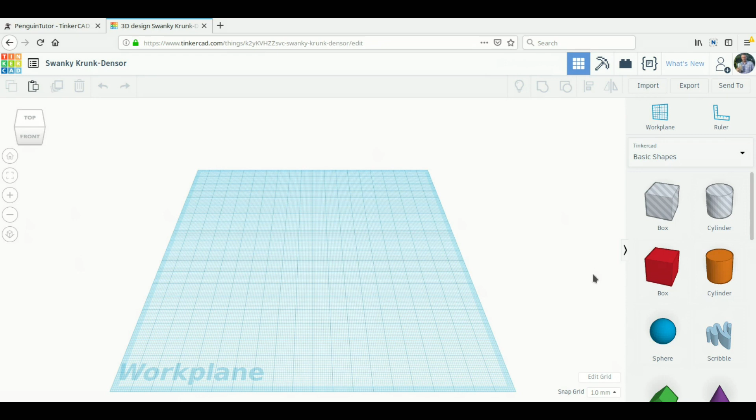So once it's loaded, you see the work plane here. This is approximately the size of a 3D printer, a common 3D printer size. And we're going to use just the basic shapes on the right hand side to create a snowman. So we'll start down with a large sphere for its body.

If you want to be specific about the sizes, you can just type in the dimensions here. So I probably want it double this size, you see each one set separately, and the height one is here. And that gives you a sphere. Alternatively, you could have just dragged them out. If you hold the shift key, then it'll keep it as a perfect sphere.

However, being a snowman, rather than going for a perfect sphere, I'm going to go for slightly elongated. I'm just going to stretch that a little bit, so it's slightly taller than it is round.

Of course, being a snowman, we change the colour. The shape windows appear automatically. Just click on that and click on white. So there we go, we've got the white body.

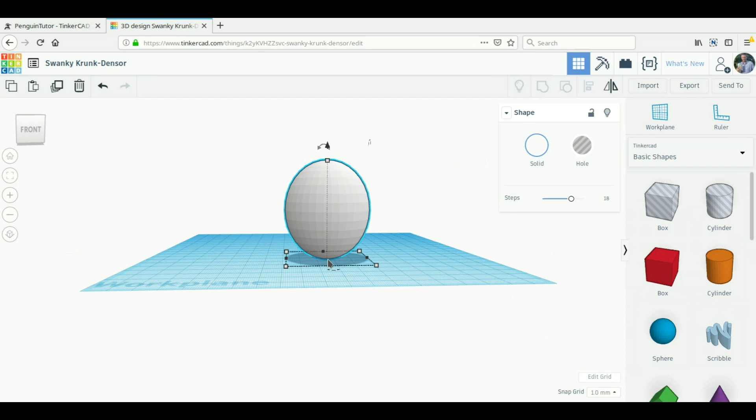Now if we 3D print this as it is, you see it's got a very narrow bottom. It's not going to be particularly stable. It's going to be like trying to balance an egg. So what we actually want to do is probably just chop off a little bit of that bottom, give it a nice flat base. So there's a couple of things we could do.

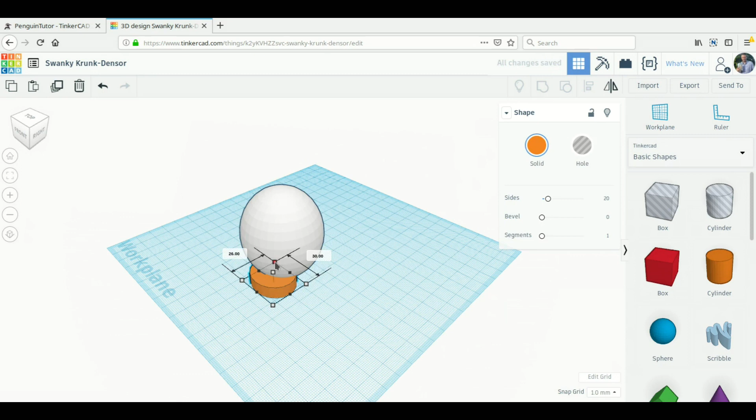One, we could take a cylinder and we could give it a base to stand on. So that's roughly the right place. For instance, you could make a plinth and we can make this the same size and shape. And actually this isn't a bad idea when you're 3D printing, because it'll give a nice stable bottom.

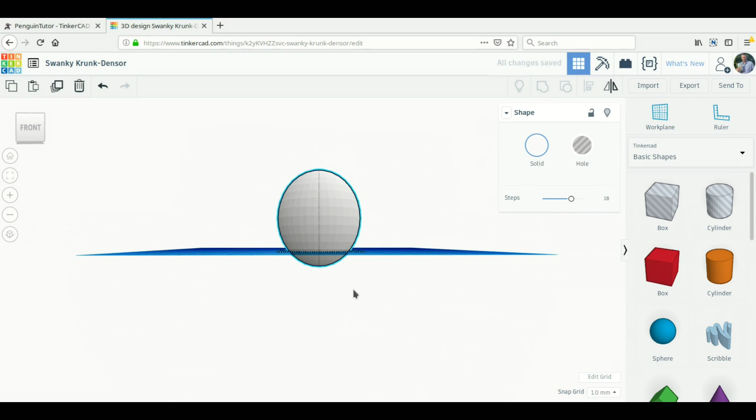The other thing that we could do is to move it down and then cut off the bottom. So what we do, show this one, we just slide it down. This is the work plane. As you can see now, part of it is above, part of it is below.

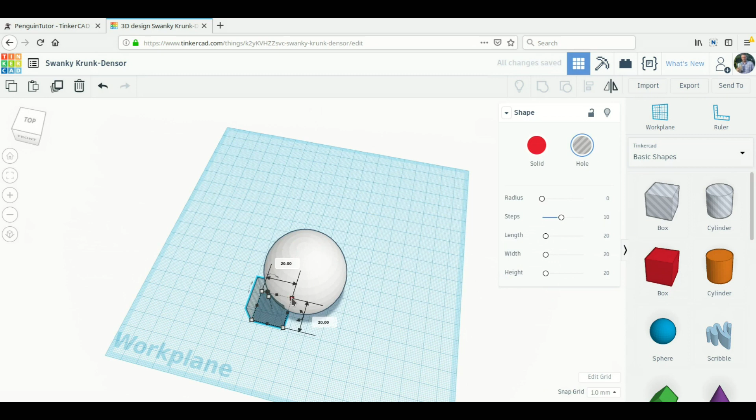Now we actually would need to delete that bit on the bottom, so you can use a cylinder or a box. Box is just a bit easier. So we start, when you place it, it always comes on top of the work plane. So we'll make it so it's as big as that.

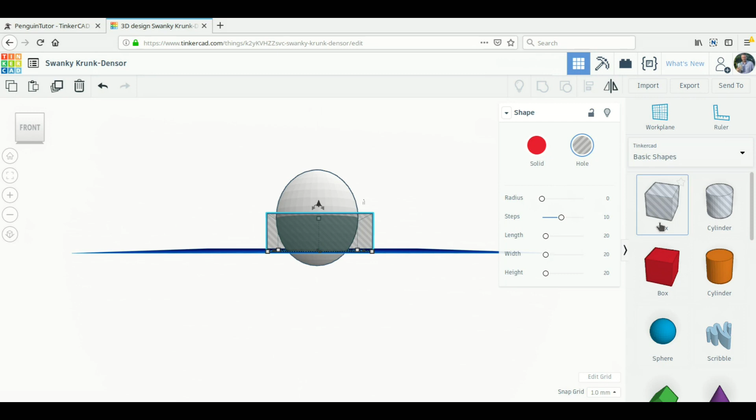If you notice, I chose the one that's hashed, which is a hole, striped rather. That means it will create a hole, as in remove parts of the object, rather than if I chose the normal box, which would give a solid object. You can just switch between them, it doesn't actually matter. So if you click on solid, then it's a solid object, click on hole, and it's going to subtract that. Now what we want to do is we want this underneath this plane rather than above it.

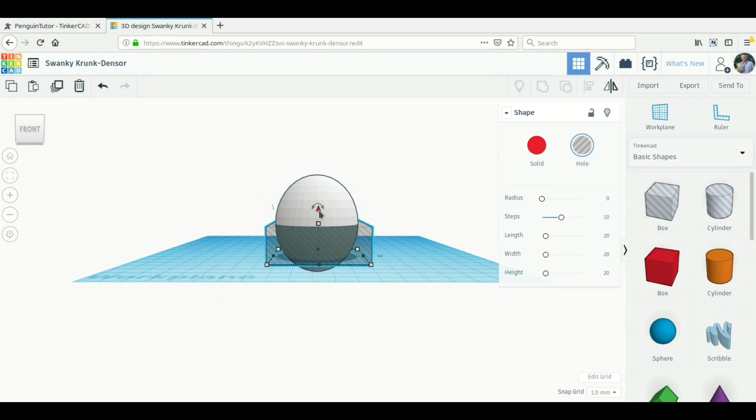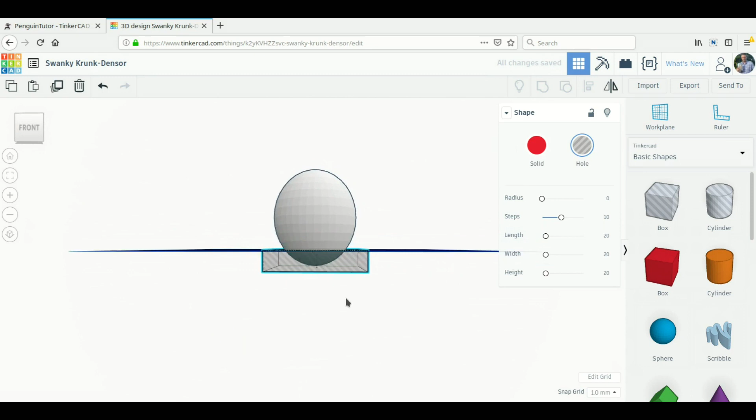So the little arrow there, and slide it down until it lines up with the plane. We don't need it quite that deep. Use the square box, didn't need it quite as deep as we had. So there, as you can see, that would encompass the bottom.

Select the two together and then click on group, which is up here, and as you can see it's grouped them together, the hole has been merged and it's given a nice flat base.

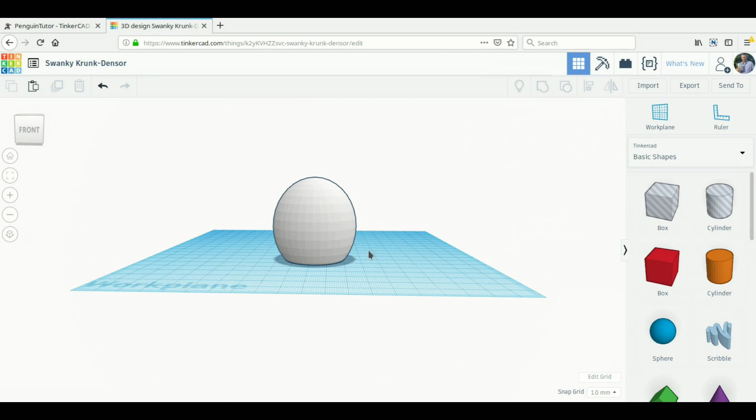Using this technique, you'll see there's a bit of a curve upwards, whether that's at the right angle for your 3D printer to not need scaffolding, or whether you need to add some scaffold on there. But that's basically the body done. As I say, the alternative is you could put a cylinder around it. You might still want to do that, gives it a bit more stability, but that's fine for now.

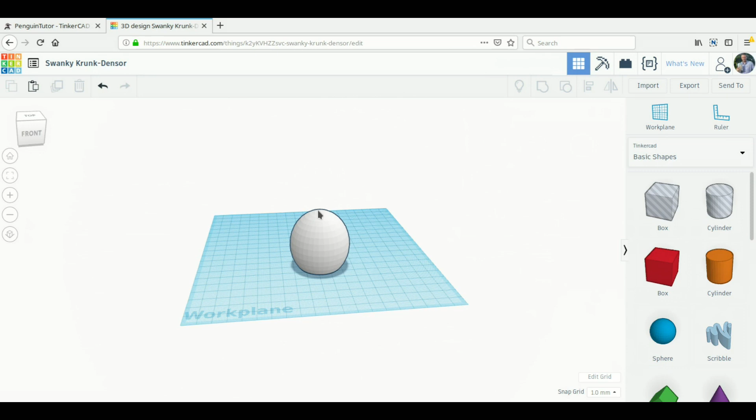So the next thing we want to do is give it a head. I'm creating a UK version here. In the UK, it's common to have two balls, a large one for the body and a small one for the head. I believe in some other countries, particularly the US, they tend to go for 3 balls, two for the body and one for the head. So I'm just going to go for the traditional one that we use in the UK.

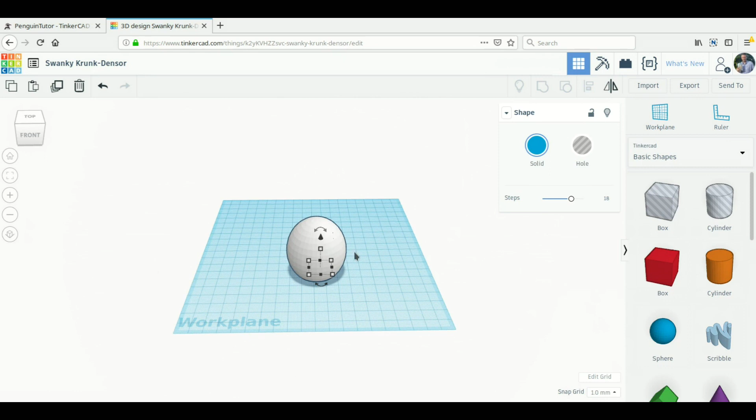So we want the sphere. As you can see, I'll put it inside, but you can't actually see it, but you can see the controls. If you click on the arrow, which is to move it upwards, there we go, so it's moved up, and you can enlarge it a little bit. If you want to keep it a perfect sphere, which you probably do for the head, then hold down the shift key while you do it. There we go.

So we've got a body and a head. And in fact, as you look round, it's not too badly aligned, but it's a little bit off. So the next thing we'll look at is how we align the two objects.

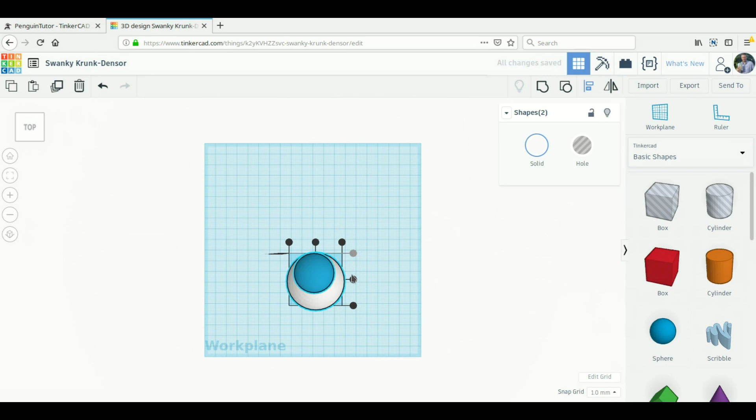Change to the top view, so we're looking straight down on it. Then up on the top right hand corner there's a button called Align. When you click on that, it gives you options for where you can align it. If you click this one, then it would all move up to the top. Let me demonstrate it - the bottom one moves it to the bottom, but the one we want is the center. So that will center it in that direction, and there we go.

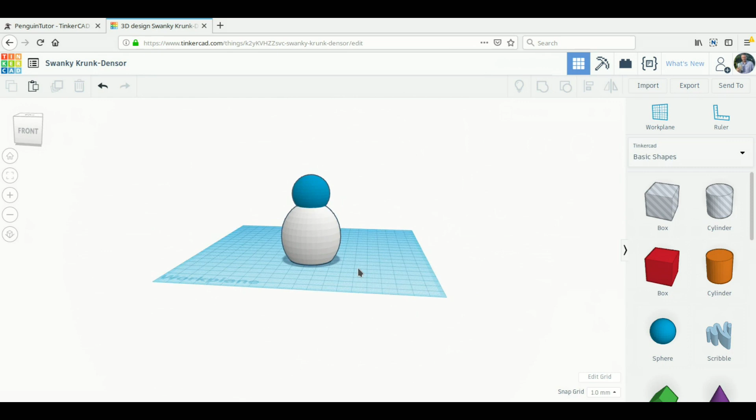So now, there we go, that's perfectly on top of the body, centralized. And as you see, we can just change that to be white as well, because it's obviously both made out of snow.

Now for a carrot nose. So there's a cone. If we just drop it on, then you'll see that it's naturally with the point at the top, so we will need to rotate that first. So you pick on this. If you hold down the shift key, then it'll jump to 45-degree increments. We want a nice 90-degree.

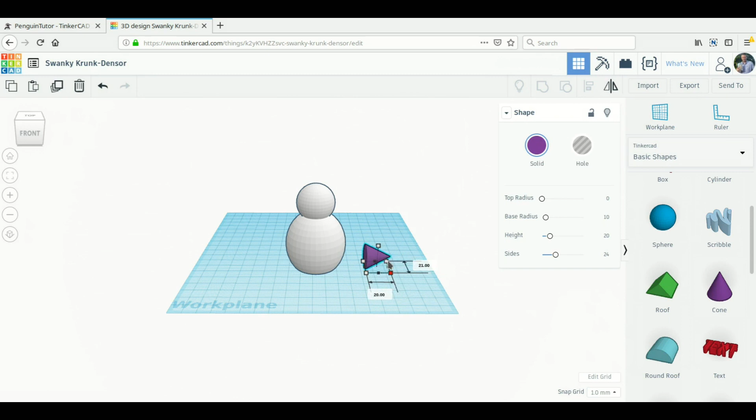You can stretch this to be whatever dimensions you want, so we can make it thinner, fatter, if you want to, you can do that. Again, if you use the shift key, then it'll keep those dimensions all lined up.

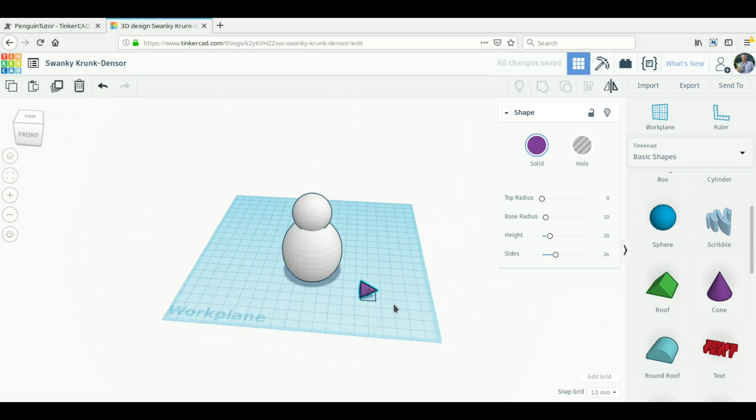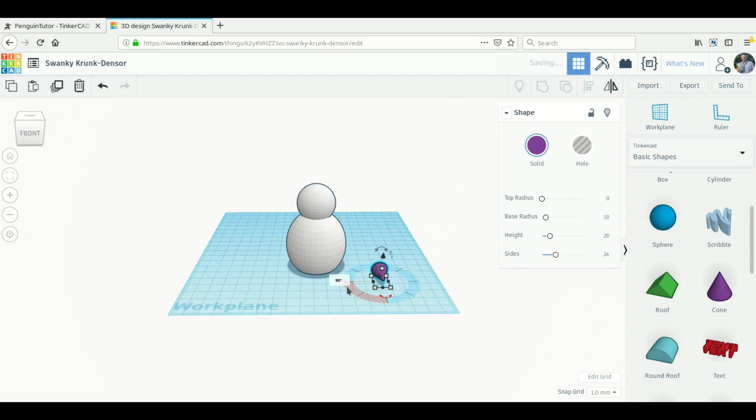But the one thing we do want to do is make it come further out. So you can grab the appropriate control, which is this one, and drag that out a little bit. There we go. Rotate it round to the front. Again, you could just type in the value, or you can use the mouse just to drag it in. And of course that wants to be orange.

Not that it will print any different on a 3D printer unless you've got a full colour 3D printer. Not many of those around, but at least it gives you the idea of what colour you're going to want to paint it, or if you might not be intending this to be 3D printed, you might just want this as a graphic to use in a game or another application.

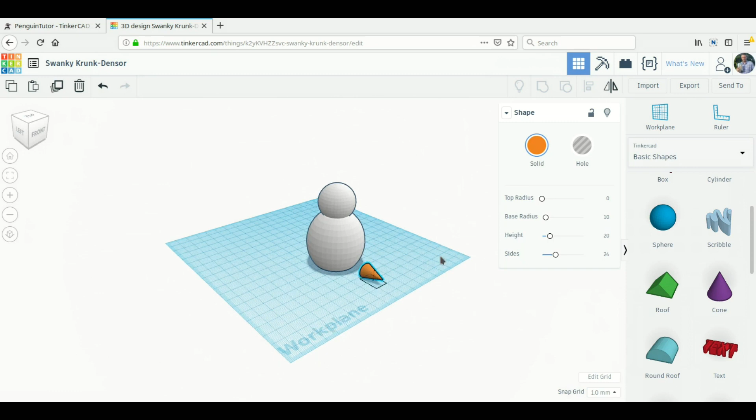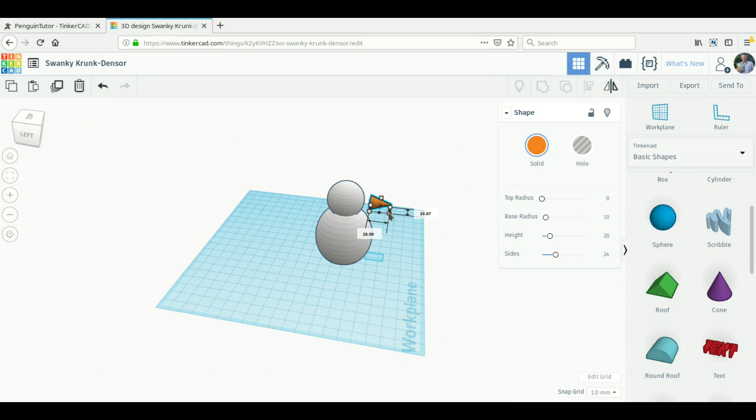So roughly position it where we want, and then use the arrow to move it up. You see that's probably still a little bit big, so just grab it and shrink it a bit more. And then we just move it into place. You can use the cursor keys, which is what I'm using here.

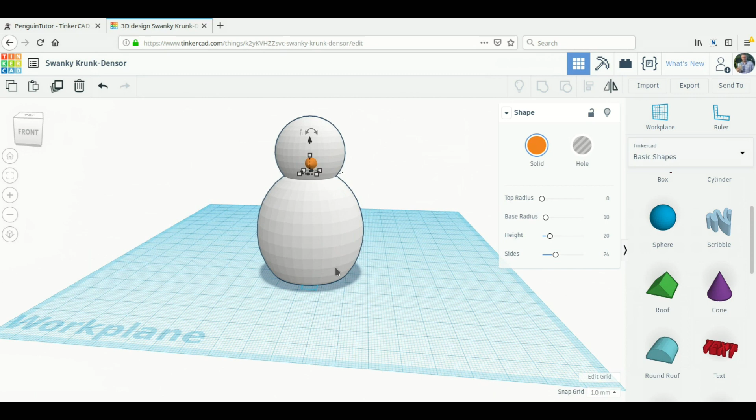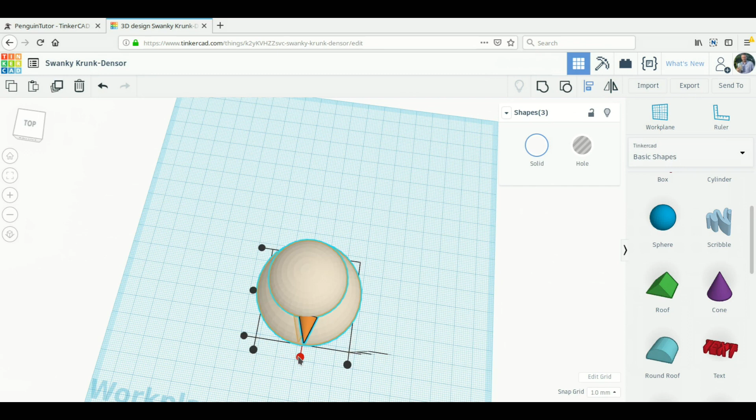Again, if you prefer to use the align, then we can do that again. That way we can get it exactly in the center. We can obviously only do it in the one direction. So we click on the align button. In this case, we're just going to go for that one. There we go, so now the carrot nose is in the middle of his face.

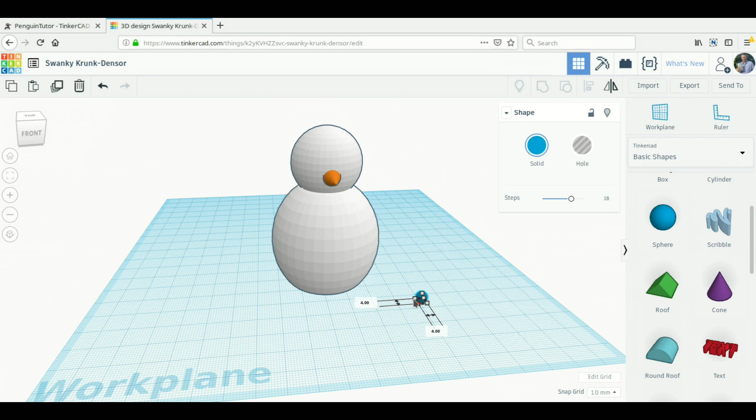We can create a couple of spheres for the eyes. And again, use the shift to get these down to about the right size. We want them black. A bit fiddly, so just zoom in a bit. About there. Bring it up.

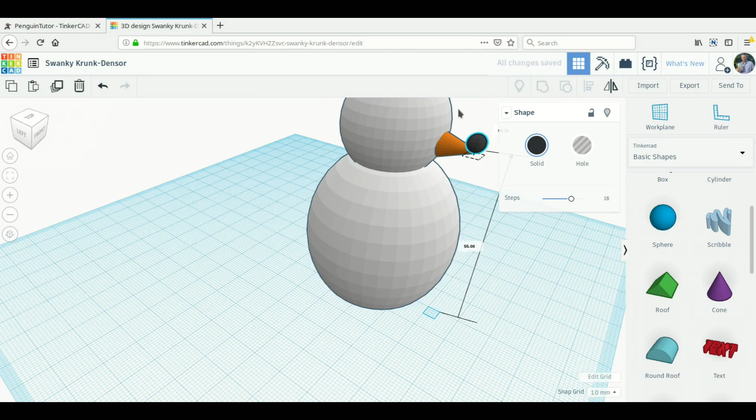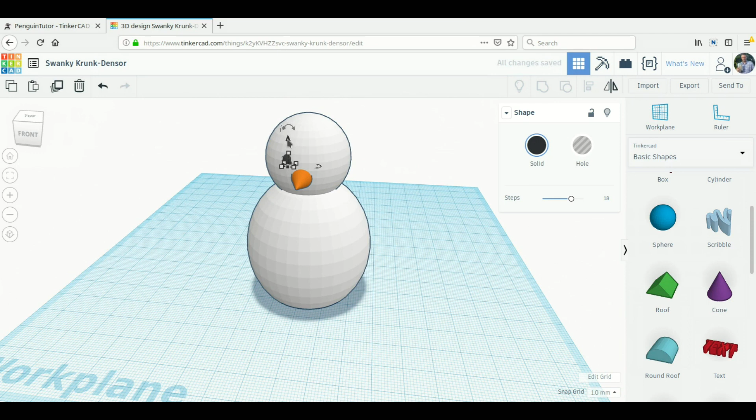I'm not trying to make it precise, just a bit of guesswork as to whereabouts. Once it's gone out of view, as long as it's still selected, I can still move it around using the cursor key or the mouse. There we go, that looks about right.

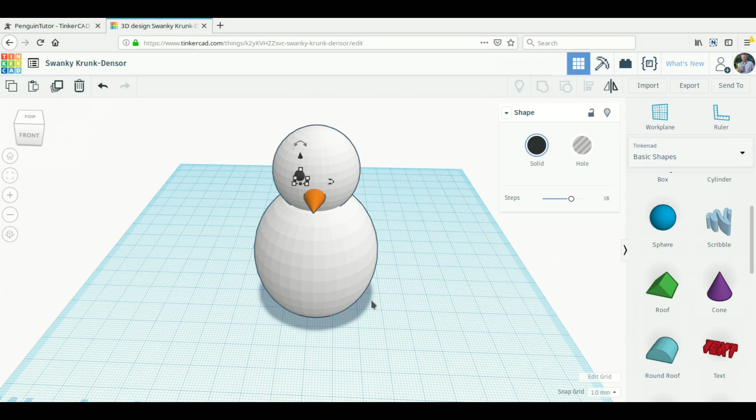Now when we create a copy of this, we need to make sure we keep it on this same plane. You can copy and paste, but it won't necessarily end up in the same place. The key here is to use the duplicate button. Duplicate has copied it in exactly the same place. Now I'm just going to use the cursor keys and move it across so it looks about the right distance.

There we go, so you can see as we rotate around, there's a bulge there. You could use the same technique if you wanted to put some spheres for buttons, anything like that. But let's move on to providing a hat.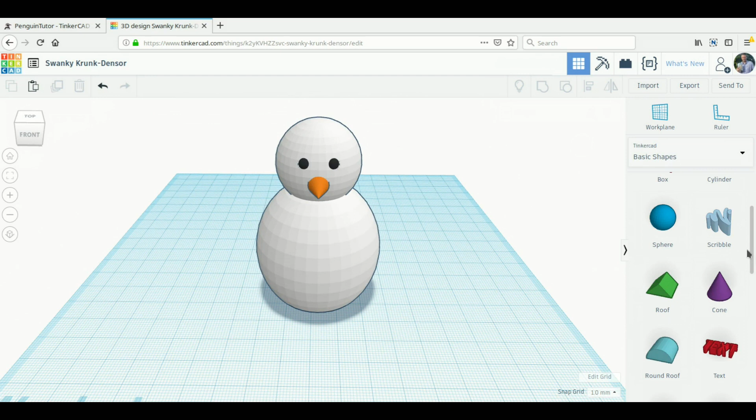In this case, just use a couple of cylinders. I'll create one first. I'm just going to... a bit big. You can see I managed to get those exactly the same, but sometimes it can be quite difficult to get it exactly lined up.

In which case just choose one, click on the other, and we'll make that the same size. Or you could use the shift key, but that would change the height of it as well, and we're kind of wanting that to be separate. So, there we go.

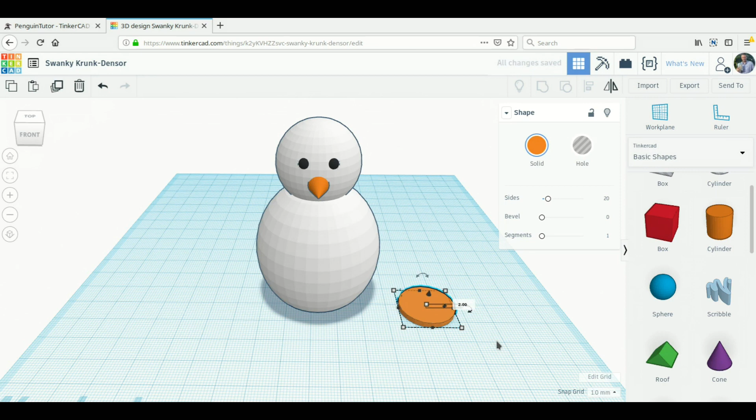We'll move that roughly to the middle. One of the things you could do is look on the bottom. That's roughly about the middle. And then, so again it's hidden in there, but we can drag it up.

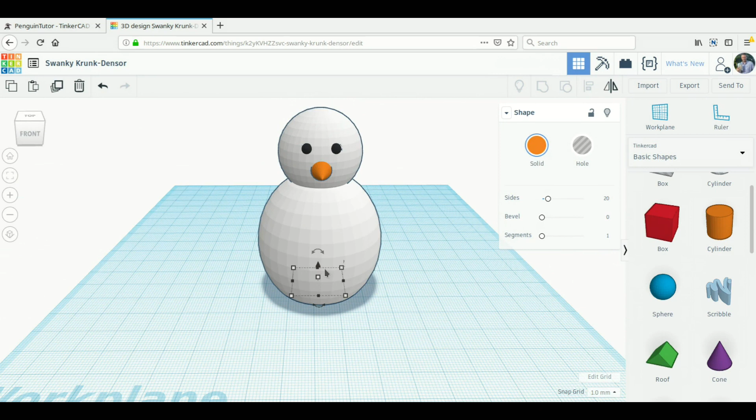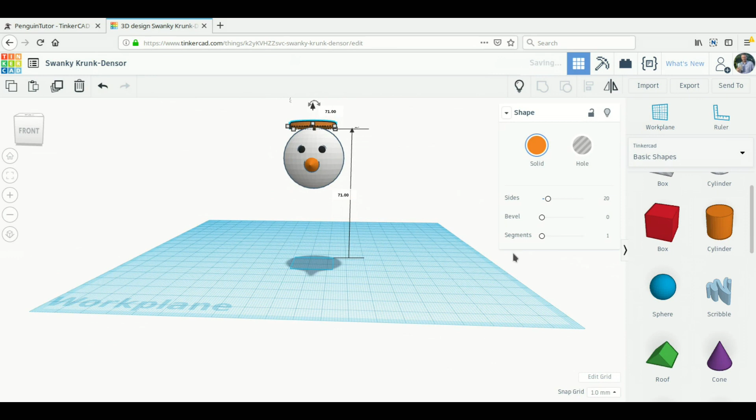Now, I've got it selected here, but just suppose I've clicked off it. Now, how do I select it? One thing you can do is hide parts - select this, click on hide, there's our thing, so we move that up to near the top, and then to unhide the part we've hidden, click on the light bulb here to show all. There we go, so we've undone it.

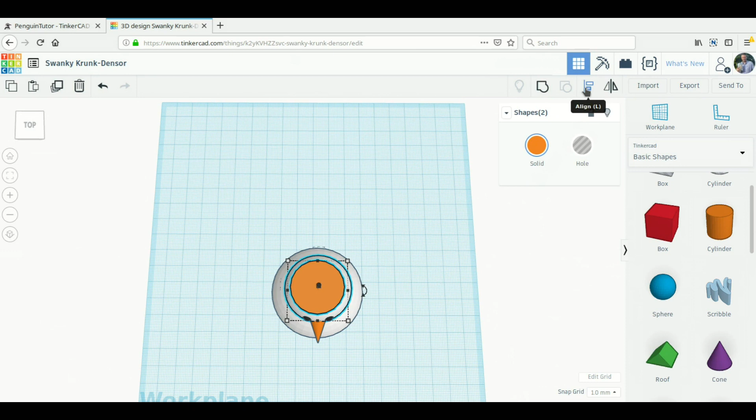Once again, I think it looks fairly central, but I think I'm going to align. I'm just going to press shift and select one of the other objects to line up against. Click the align, and if I click the object I want to line against, it will only move the hat and not this head. Whereas if you hadn't done that, it could have moved the head, which wouldn't have been aligned with the body anymore. And there you go, you see it's just the hat bit that's moving.

So, just move it down a little bit. That's about right.

Now we want another cylinder to go on top. A couple of things we could do: one, we could drag a cylinder beyond the bottom and have to drag it up. We could duplicate this, try and shrink it, and then move it up.

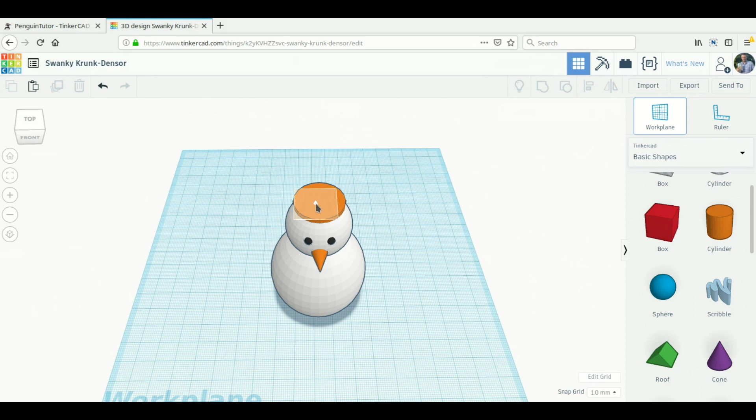But I'll just show you another thing, which is the work plane. While ever we've been doing this, the work plane's been on the bottom. That means if you move your cursor, it moves in relation to this work plane, and whenever you drag something on or off, it's onto this work plane. What we could do is take the work plane and put it on top of that. As you can see now, the whole of this is underneath the work plane.

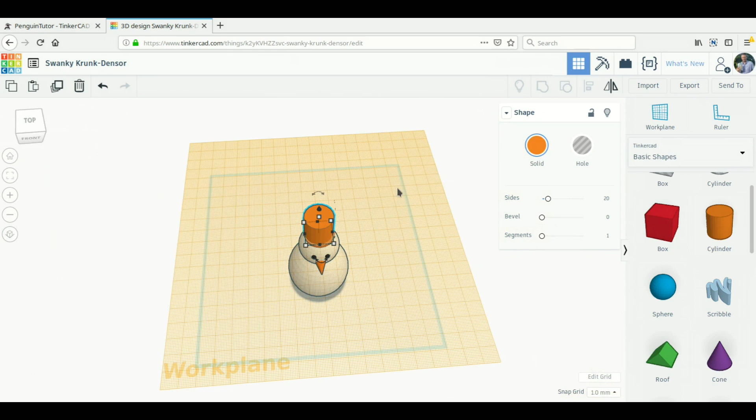That means if we take another cylinder and drop it on, then it's on that top work plane instead of the bottom. When you're done with the work plane, you can just drag the work plane to anywhere that there isn't something, and it disappears, going back to its original position.

So again, we're going to shrink this in size, bring it down a bit. I'm going to deliberately offset this so you can see how the align works. I wanted to align this with the other part of the hat, so I'll select that bit and that, using the shift button, click align.

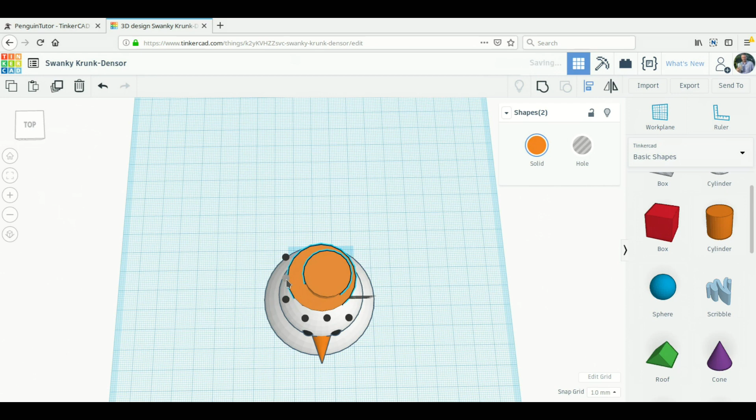Now as you can see, there are some of the black dots in different positions. So if I click on that, it'll align the larger cylinder to the smaller one, which is not what we want. So if we click that, then it's going to align against that. No, clicked the wrong one - try that again.

Line it up against that one. There we go, and then against that one. Okay.

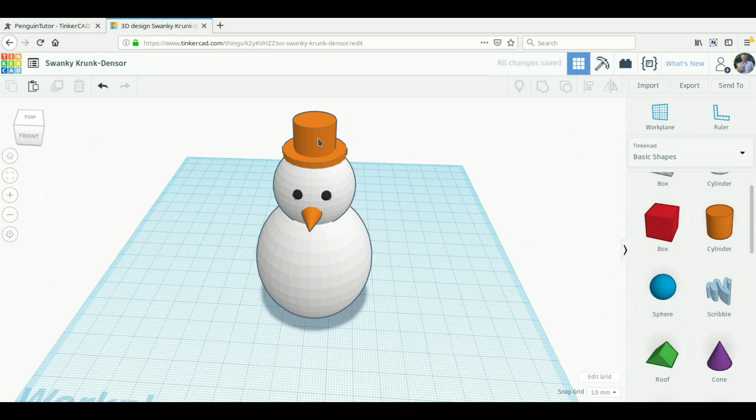To make it slightly taller or slightly shorter, feel free to do that. And of course, we want these to be whatever colour you want, and choose a black hat.

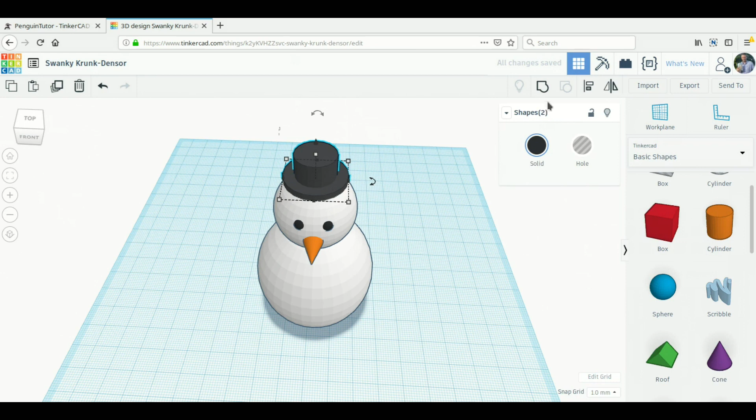You can group these together at this point if you wanted them to stay together. In fact, at this point, I think I'll group everything together. That means I won't accidentally change any of these other bits. So it's on here, the group button, and this has become one group.

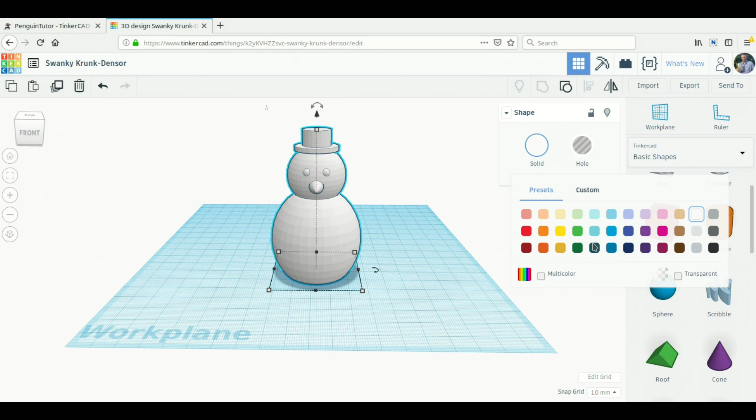However, you'll notice that the colour is gone. It's just gone to one single colour, which is how it's going to look 3D printed, but it's quite nice to see if you want to choose the colours. To do that, click on solid, and as well as the different colours you can choose, you'll see at the bottom there's a choice for multicolour, and there we go, we've got our colours back.

So the next thing to do is give him some arms. Again, everything's just using basic shapes here. We'll just use the cylinder again, make it nice...

Now we'll go for a brown stick. So in this case we're going to want it angled outwards, but we're not going to go for an exact angle. How about that?

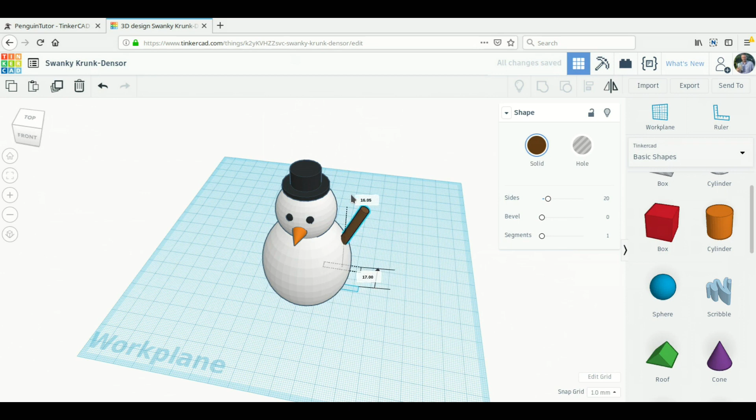Yeah, and then move it into position. Bring it up. There we go. Just put it roughly about the middle. Close enough. Then if you wanted some little bits, stick it off it again.

So I'll just type it in here manually. Rotate this the other way.

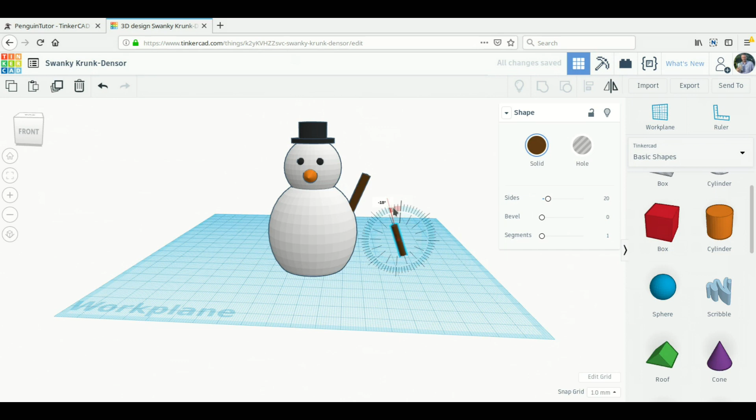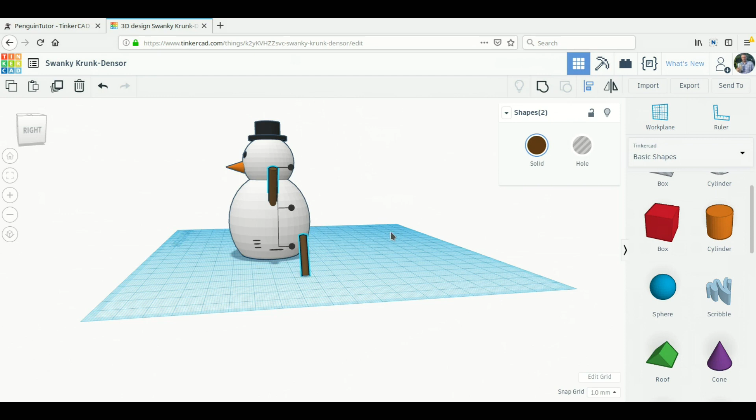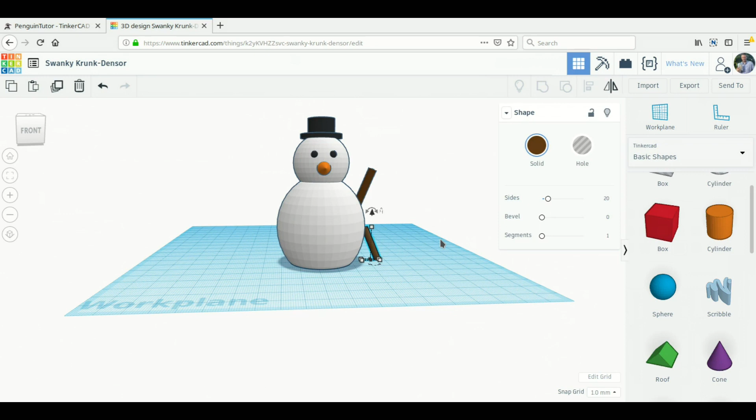Now we know it's aligned along that axis, the y-axis, we can just use the cursors to move it along the x, and go back to using this to move it on the z.

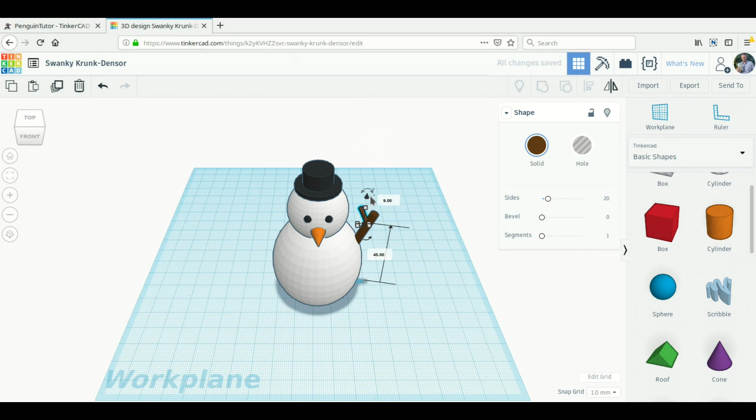That's probably a bit big, so let's just bring it down a little bit. There we go. Always keep moving around, because it's very easy to accidentally move something on the wrong plane and then not be able to get back to it.

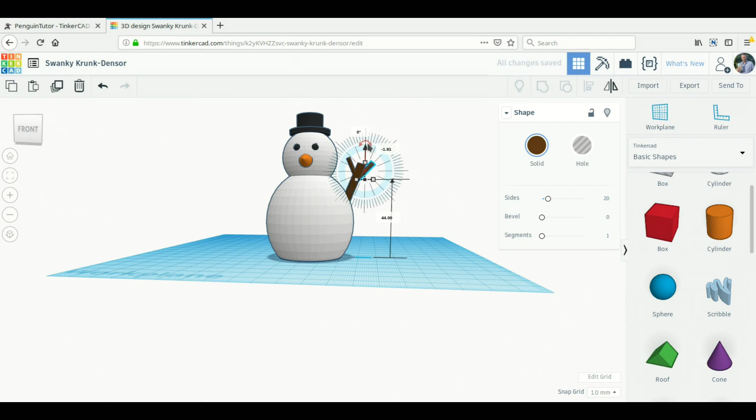So let's duplicate that, rotate the new one that way, and then just move it where I want to. Angle it down a little bit more. There we go, so now he's got a bit of a stick for his arm.

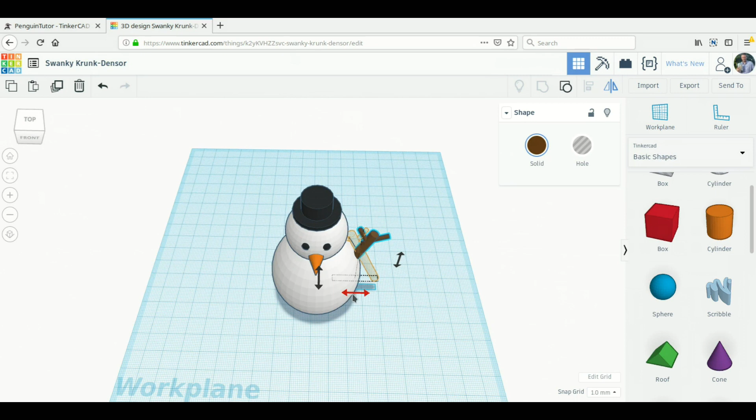Group those together. And to make the stick for the other side, we can just duplicate and then flip. When you choose flip, it gives you the options. If you click on that one, it flips it that way.

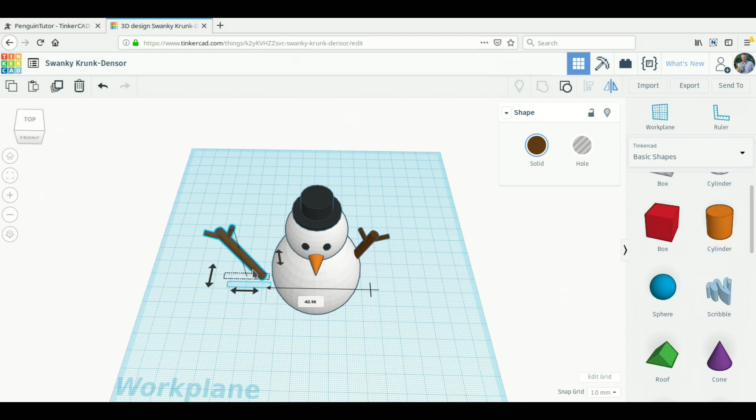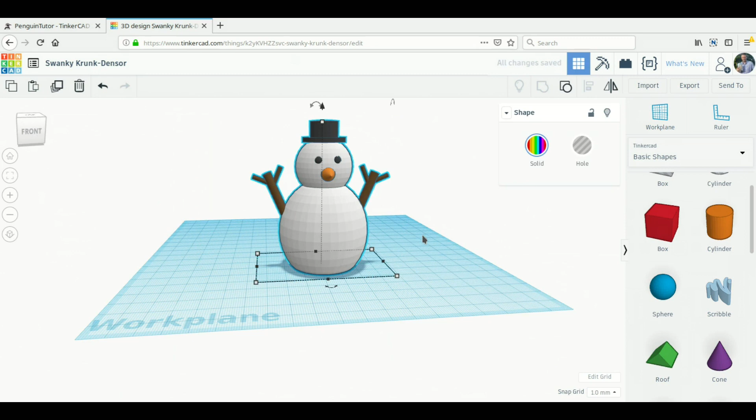There we go, have a look around, and just group all that together again. And there we are. It's remembered the multicolour setting from before, so one snowman.

One more little trick to show you: I made it hollow because I wanted to be able to, say, put an LED inside it and light it up.

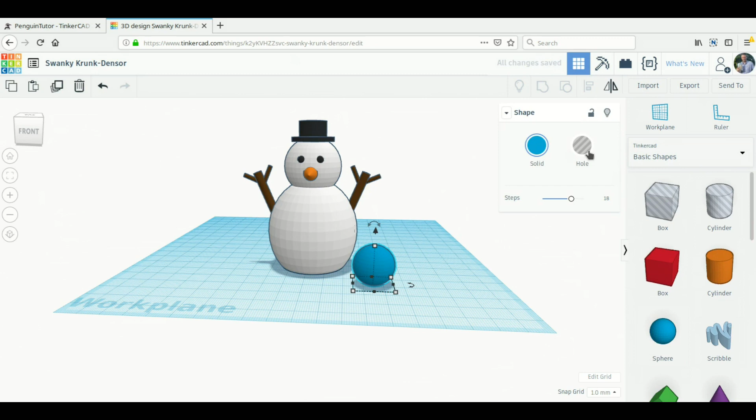Going to use the sphere mainly, just to hollow out a nice sphere in here. There isn't one that's already a hole, so we take a solid one, convert it into a hole, and we sort of put it inside there.

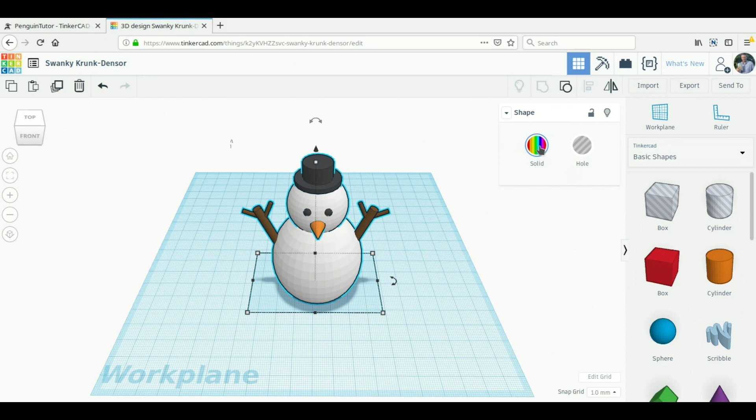Problem is, you can't see it. You could make that invisible, as we did before, hide it, but then that doesn't really help with the positioning of the hole either. So one other nice little feature is if you go into the colour of the snowman object, click on solid, there's a transparent option, and now you can sort of see through it.

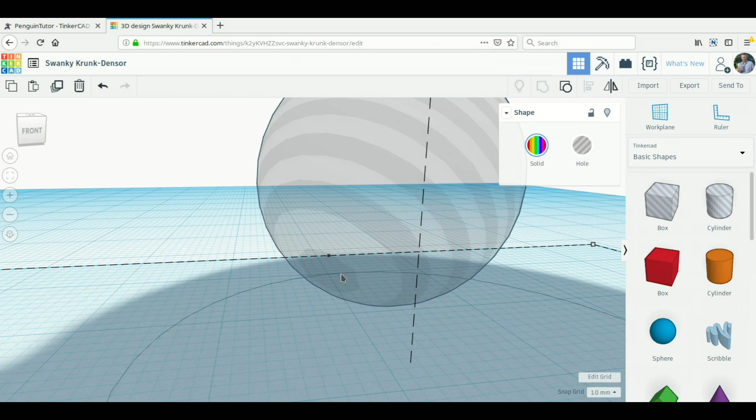So it's basically showing a wireframe with a little bit of shading of the main object, and then you can see the sphere inside. You can zoom right inside, and then we can grab hold of that and pull it till it looks about the right sort of size.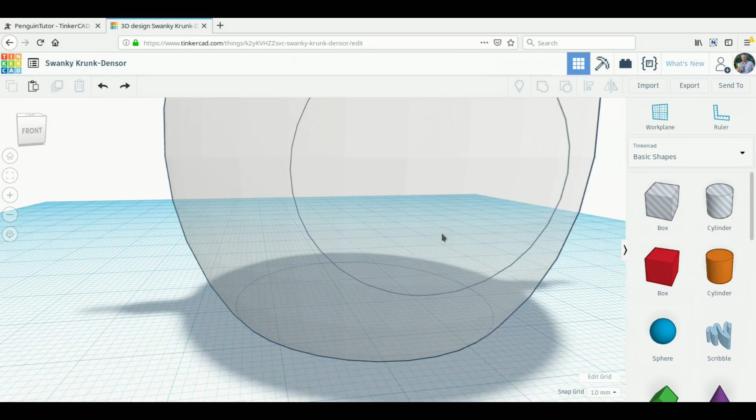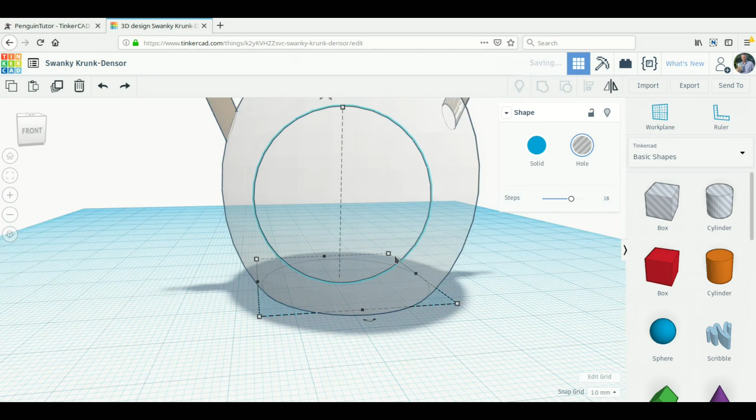One of the difficult things here is picking the right object. I just find it easier if you zoom inside. While I'm doing it, I'm accidentally clicking on the thing, so if I just move it manually, I'll make sure you use these. So I want to get it...

Oh, so as you can see, when it starts to touch through the sides, then it goes a different colour so that you can see.

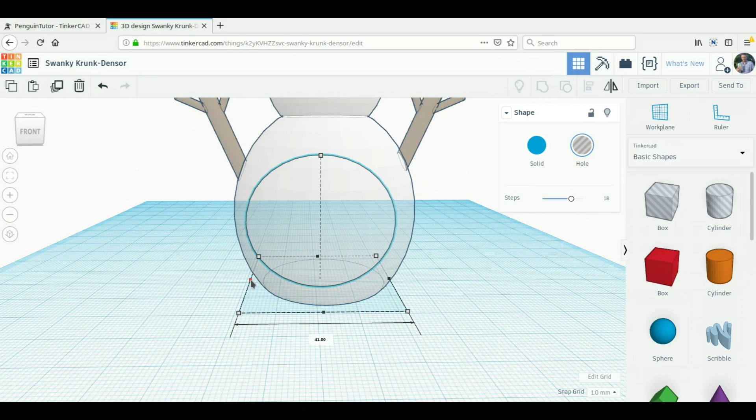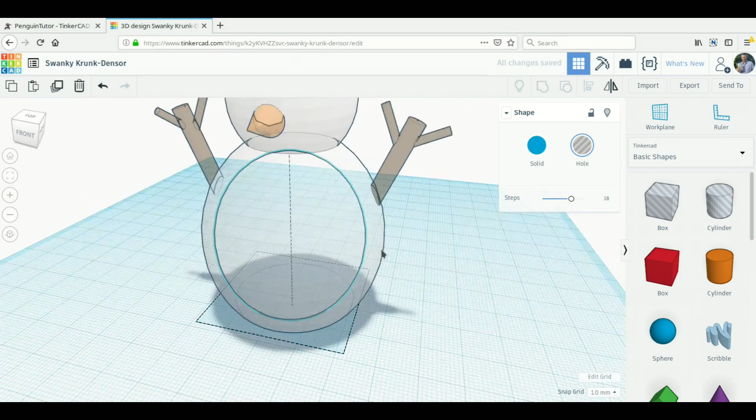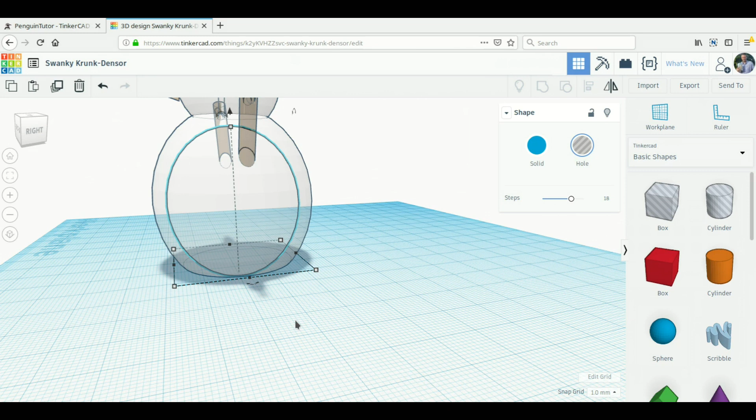Stretch it, move it down. We want the hole to go all the way through, and then stretch it back up again, so you can roughly gauge the thickness. If you wanted to do this more accurately, you could remember the size of the outer object, make this approximately the same size, then shrink it a little bit. But really, this is accurate enough, if all I wanted to do is create a hollowed out hole.

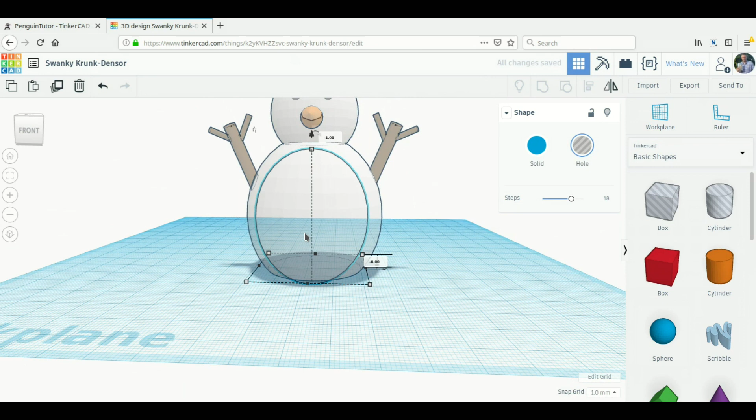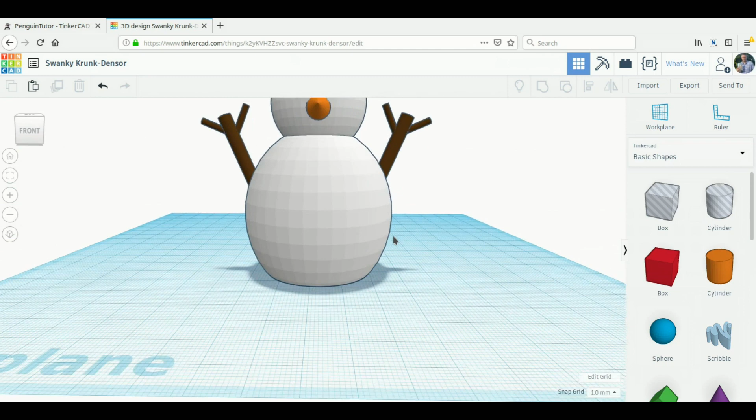So that's already set to a hole. If I just group it, then it'll actually put that hole in. We're still in transparent mode, so if I put that back in solid, you can look from underneath and see there's a hole in there. Not only that, as you zoom in, you'll go inside, and we can have a look at what it looks like inside.

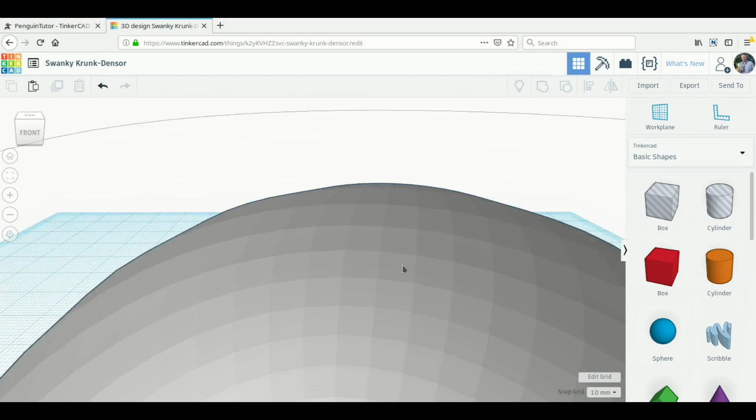So sometimes it's a bit of a guess for you. Right, so if we go inside, you can see... about. That's it.

Now, if that's effectively a complete model, the last thing we need to do is give it a name. TinkerCAD just comes up with some really strange generated names. I've already got one called Snowman, so I'll call this a new Snowman.

Now you can just click export if you want to download it as an STL file that you can use for 3D printing, or you could send it direct to a 3D printer company.

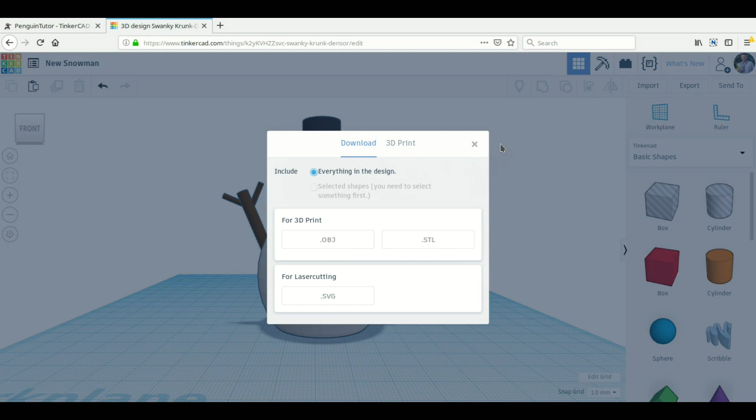One of the things with 3D printers, if you've got any experience, is that sometimes it might be unstable. It's good to have a nice solid base and things like that. So you can always add shapes if you want to help with 3D printing.

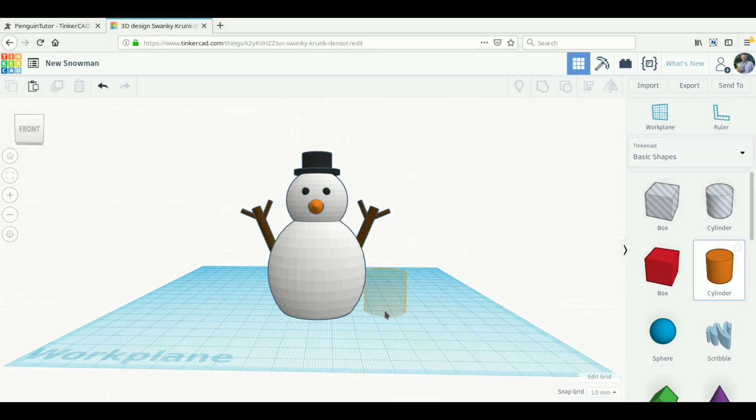For instance, with the scaffolding, I found out problems with the scaffolding wasn't stable enough. So one of the things I've done when I 3D printed mine is just pick bits of shapes and give it a nice wide base so that it gives a bit of stability. Then...

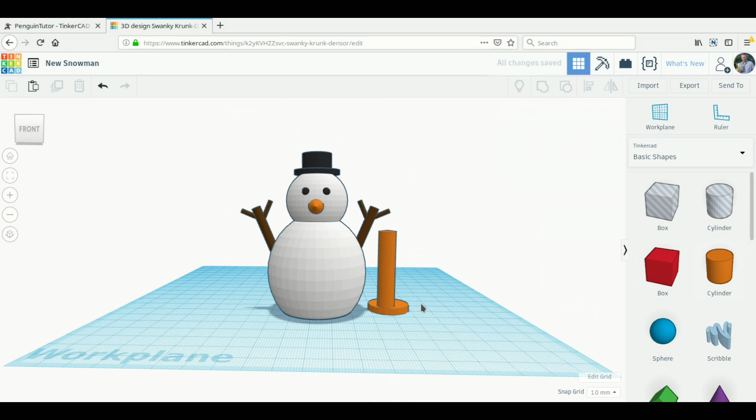Print it like that. If you add the scaffold option in your 3D printer, then this will be printed quite strong, and it'll give it stability while it's printing, and then it'll just have the scaffold bit there which you can remove quite easily.

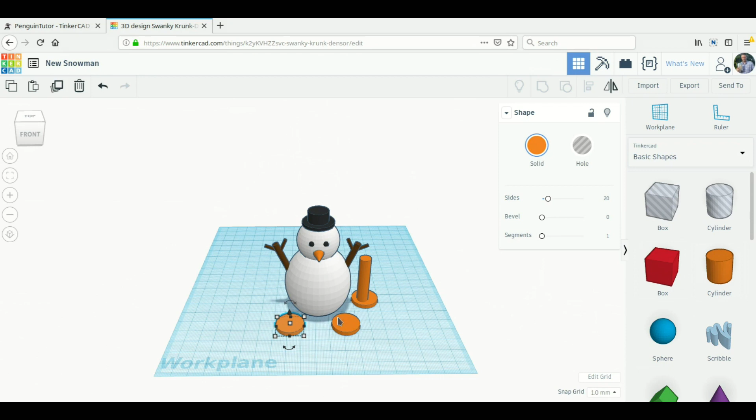I did have problems with it tipping over, and a simple solution to that, I just put some cylinders around. Make sure they're close enough to the model that if you turn on the print bed adhesion option, it adds some extra rafting that's easy to remove. If you put these shapes here, then it'll go around these and make a nice stable base.

It all depends on your 3D printer. If you want to just try 3D printing it and see if it works, but if not, then there's a few little hints that may help. I'll just remove those for here, and I think that's it for now.

So that gives you some idea how you can just put some shapes together. You saw how you can hide and unhide, use the group option to group them together. Remember, if you use a hole to remove parts, then when you do the group, it actually takes those parts away.

One thing to bear in mind is if you take something off and then add something on, whichever's the last one added to the group will be the one that dominates. So for instance, if I'd made this hole and then put these sticks in for the arms, the sticks would be protruding inside the hole, whereas by leaving the hole until last, it's removed all those. Ungroup if you want to ungroup something to edit it.

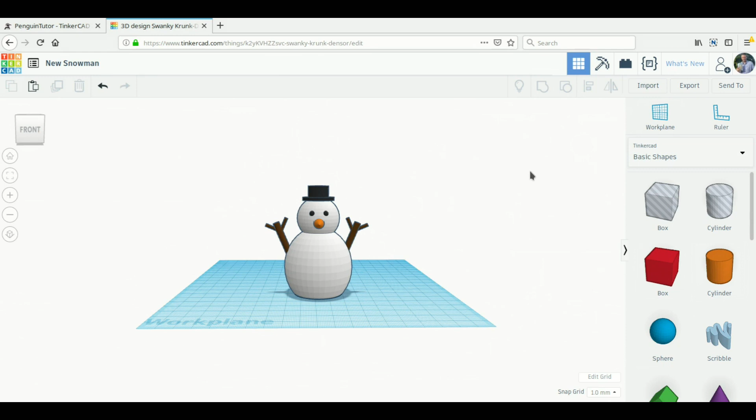We did use the work plane briefly to move the work plane so that we could use that. As you can see, we've used quite a few of the different features within TinkerCAD that can be really useful. Even though this is quite a simple object and it's only taken a short period of time to create, we've got to have a bit of experience with quite a few different features. So hopefully you found that useful.